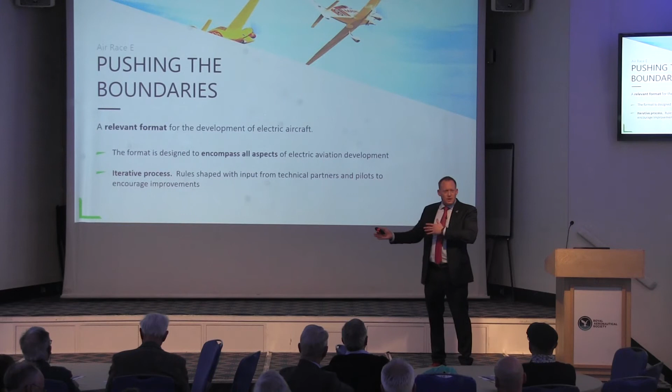So products and services they want to sell later on - we very much have to keep that in mind, and we take on board their contribution. We want a holistic and collective approach to writing the rules and developing the series so it goes in a direction relevant to where they see the market going. It's very much an iterative process, going back and forth between how we see an exciting air race, but being relevant to the people actually submitting the teams.

So obviously a key message for us is sustainability, clearly. Bringing electric power to the market, but it has to be sustainable financially and economically as well.

The great thing about the airplanes we use is that they're home-built airplanes. These are experimental class - well, in the U.S. they're experimental, here it's permit to fly, but we've got a new experimental class which the LAA is working on, relevant to these planes. The idea is that they're simple structures, simple platforms that are very malleable - you can change the engineering of them all.

I guess what I'm saying - this is where it'll showcase my lack of knowledge, because I was about to say they weld the planes together and you can have a plane. That's about as much as I understand about building a plane. But these aren't kits, these aren't planes you buy, these aren't planes that come in a kit that you put together. These guys manufacture and fabricate these aircraft from plans that are perhaps in a CAD drawing or on the back of a napkin that they designed themselves and brought to fruition.

The great thing about this platform is that they're adaptable. We're taking the same aircraft that already exist in Formula One air racing and just retrofitting them and shaping them to start the race. Now, as we go forward with electric racing, all of these things will open up, and the airframe and everything else will also be able to be completely adapted. So how do you do that? You do that in a formula.

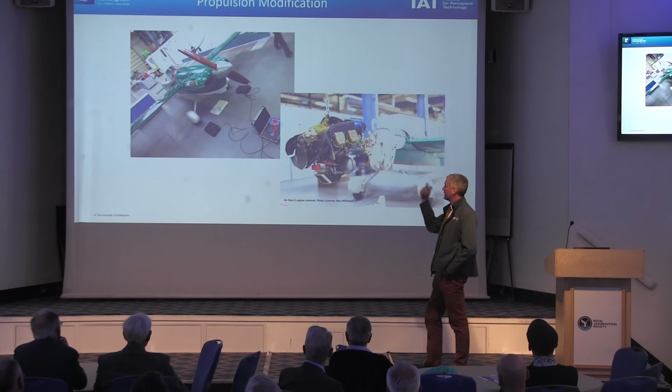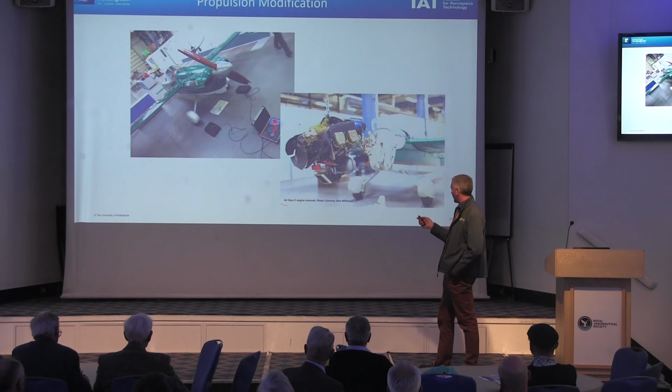Okay, so some pictures of the airplane in the lab. We've done some weight and balance work. We're pulling the original propulsion system out - there goes the engine. We're putting a new propulsion system in. We want the airplane to be pretty well the same in terms of its performance, mass and balance as what came out, because we want to baseline and benchmark that performance capability first. So we've got our facilities in the lab to do that.

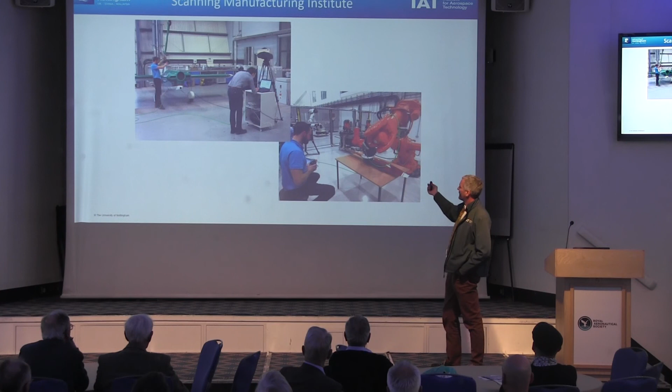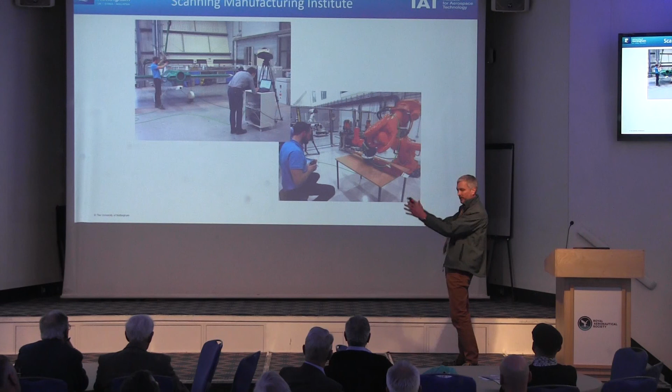This is some detail of the scanning, and the video is just coming up - this is a laser scanning system where we can basically take the geometrical data directly off the aircraft into a CAD system. It can even be done using clever robotics to drive the laser around the object we're trying to scan. This video was actually done for promotional purposes, but this is when the aircraft was delivered basically last year.

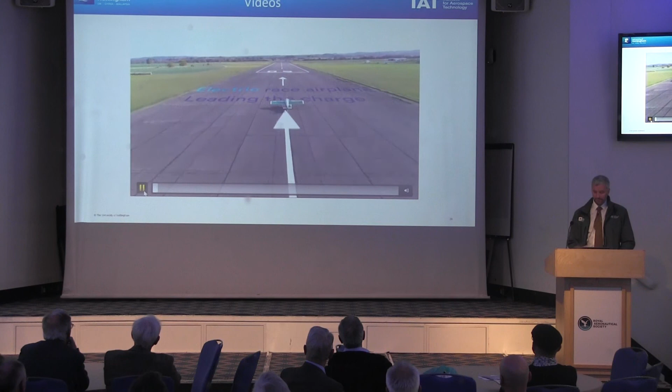We can apply the highest level cutting edge research in electrical propulsion systems to any transport domain, but in particular aircraft. Currently there's no electric racing aircraft program running in the world. As fossil fuels become more expensive and difficult to obtain, electric motors and propulsion will become more important. We want many teams to use this unit, so it needs to be interchangeable on many aircraft. This aircraft represents the sort of technology which can be adapted towards much larger commercial aircraft.

This is going to be a video of the scanning process. We're trying to bring in the rest of the university. There's a lot of technology going on: materials, manufacturing, other production processes. This is one of them that's key. We've got a very big investment in the Manufacturing Institute at the university at the moment.

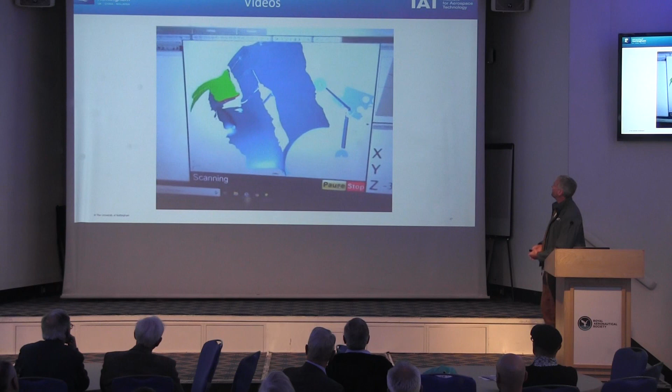So, screenshots. The lasers pass over the physical object. There's a stereographic camera system which can pick up the laser line as it passes over the contours of the object, and it goes straight into CAD. That makes my job really simple, because I've now got a CAD model and I need to fit where the batteries go, is there enough space - just the spatial location of the new propulsion components. Our manufacturing crew were super valuable for that.

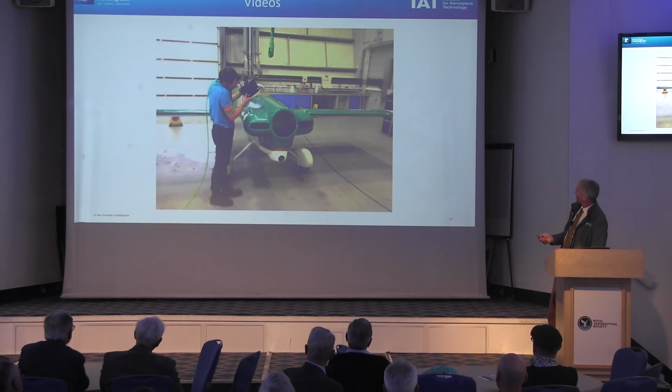And again, with the propeller, it's of use. There's a whole range of different propellers we could use, but it's useful to get a model of this propeller, which came with the aircraft. This is showing you the robotic application of that technology.

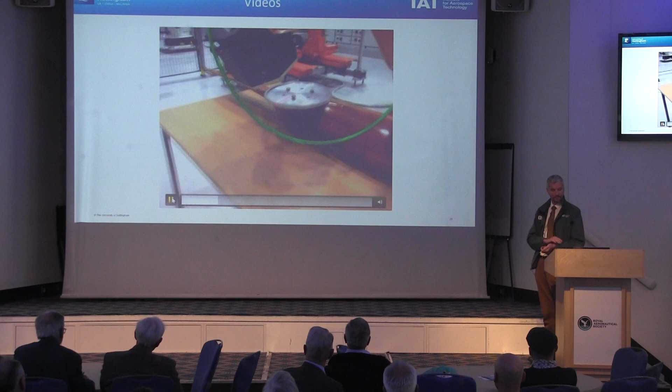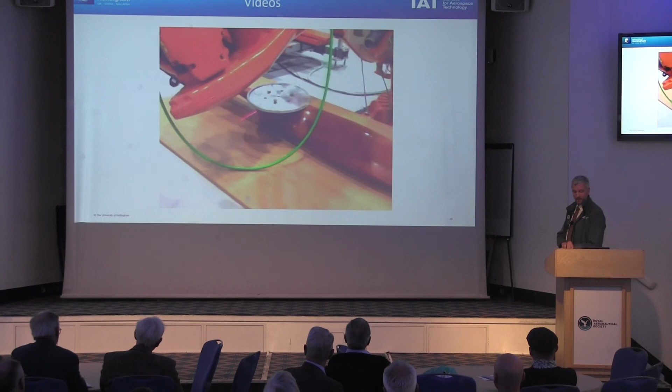We're already being very successful at the moment. This program is working well in the university. It's bringing together our different research arms and coordinating them, for very useful results. And it's definitely helping me in my job putting together the electric racer.

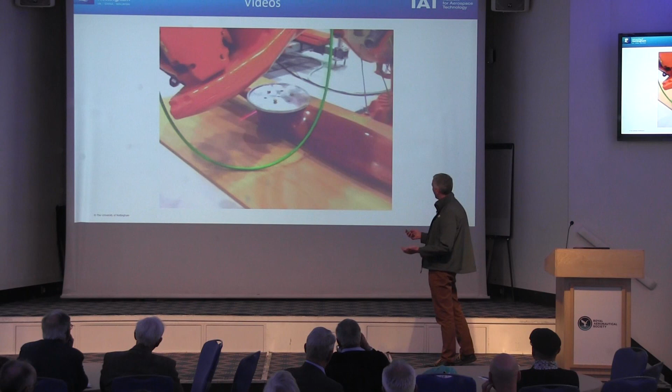It's great for publicity, of course. This was a big opening of our Manufacturing Institute, where the very top guy from Siemens came along, and this was a major part of the show. So we're very happy with that.

It's just ongoing work, electrical system design. We've got to procure various components. Some are in-house designed and developed, some will certainly in the first case be commercial off-the-shelf components. We intend to develop a complete power electronics and motor drive system in-house, and we can do that and build it. But to start with, to get this thing flying as soon as we can, we'll be integrating commercial components - the mechanical system design - and of course we're working with the airworthiness side of things as well.